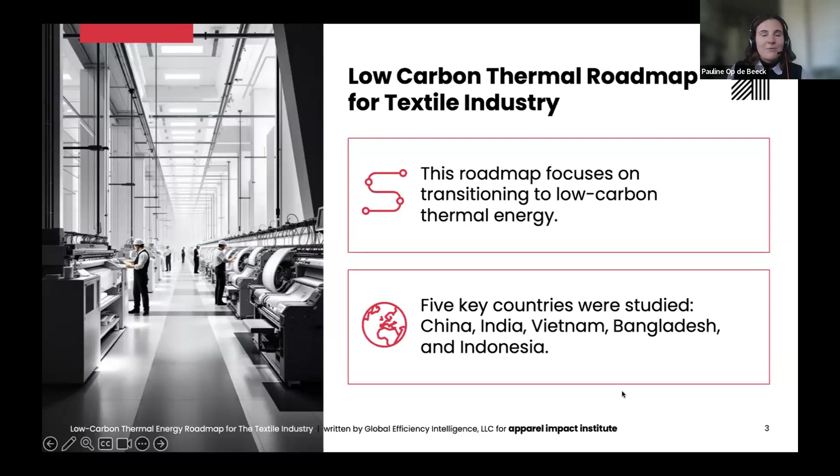And we've commissioned this report not only for the sector to align on and to drive action on this topic, but also to inform AII's grant making, AII's work on how to support the sector on its way to this transition as well. So with that, I will hand it over to the GEI team, who are the authors of this report, to take us through the first part of this webinar.

Thank you, Pauline. Well, hello, everyone. I'm Ali Hasanbeigi with the Global Efficiency Intelligence. Very quick about us. We are a consulting firm based in the US doing work on industrial decarbonization across different industries and across many different countries.

Fun fact, I actually have a textile engineering background. I always say that because not many people working in industrial decarbonization have a textile engineering background. I did my undergrad and master's degree in textile technology engineering. And then since my PhD around 20 years ago, I kind of branched out to broader industrial decarbonization work, doing work on other sectors as well.

But having that textile engineering background and mixing that with the industrial decarbonization work that I've been doing in the past 20 years, we have been doing a number of works on decarbonizing the textile industry, including this latest work that we just published today on the low carbon thermal energy roadmap for the textile industry. First, I would like to thank Apparel Impact Institute for their leadership in this area and also supporting this work. We are literally pioneering this topic for this sector. I hope you will feel the same way and you find the information helpful.

So we published a report. It's actually the second report of a two-report series. We published the first report a few months ago, which was also an extensive analysis of low carbon thermal energy technologies for the textile industry, a lot of qualitative analysis assessing the application of these technologies across many different countries. And in this report is extensive quantitative analysis and then discussion on the roadmap and the recommendations,

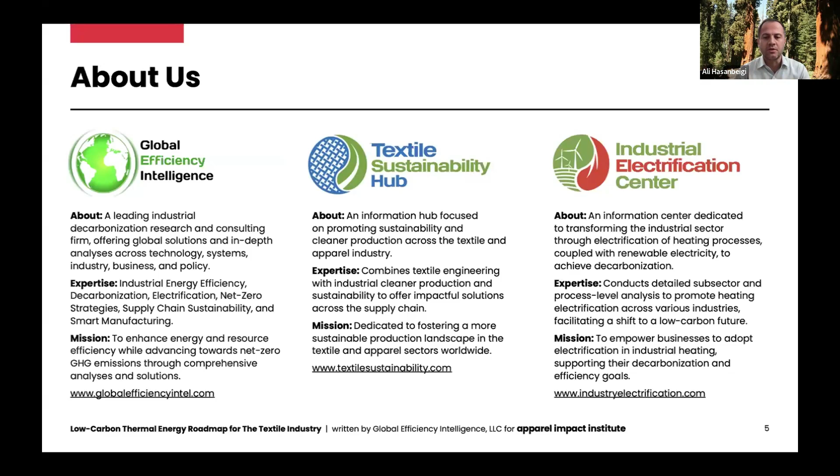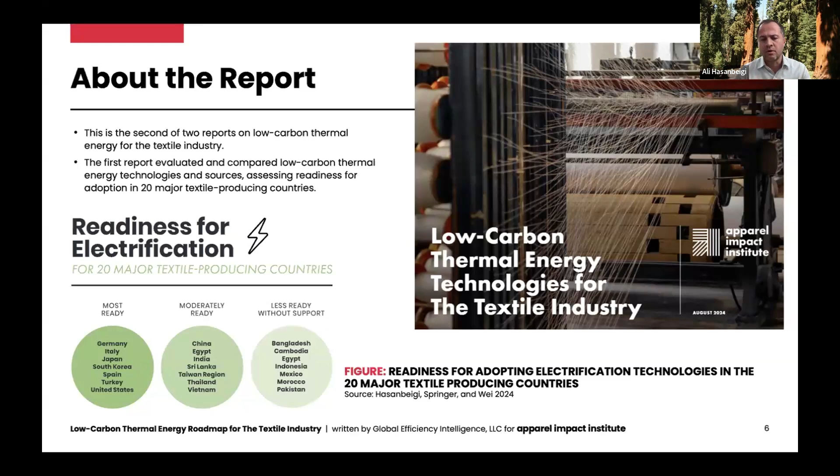So as I mentioned, this is the second report of the series. A few months ago, we published the first report, an extensive analysis, 75 plus pages, where we looked at six different low carbon thermal energy technologies, explained them, and also assessed the readiness for these different technologies in different countries. Top 20 textile producing countries, and we show in different formats how different countries are ready or not ready for adopting these technologies. So I refer you to that previous report for more information.

So when we talk about the industry, and in this case textile industry, there is electricity use and there is fuel use for heating. Electricity is kind of straightforward. You need to use renewables. Fortunately, more and more in major textile producing countries, for example India, China, and now Vietnam and other countries, we are getting more renewable generation. We are getting corporate RE procurement. So it is becoming relatively easier now to decarbonize the electricity part. The heating is the challenge. That's where everybody is scratching their head. So that's the focus of this study, today's conversation and the report: how to decarbonize heat, which accounts for a significant portion of the emissions in industry, and also textile industry.

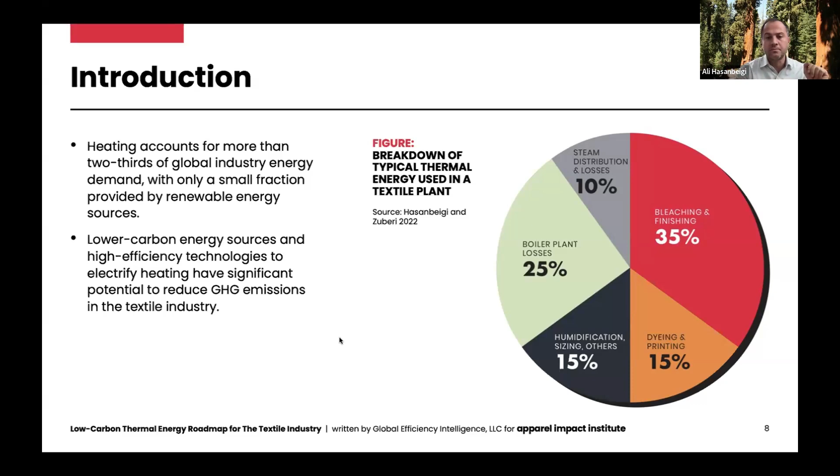So just for a second, let's step back to the big picture. Almost everything you do to decarbonize any industry, including textile industry, falls under 5 decarbonization levers or pillars. Material efficiency, circular economy: anything about recycling, waste management, waste reduction, demand side work, that's that pillar. Then energy efficiency is straightforward. Electrification of heating, which a lot of today's talk is on. Low carbon fuel and feedstock, for example solar thermal, sustainable biomass, etc. And then, of course, CCUS, carbon capture and sequestration, but for textile industry that is kind of irrelevant.

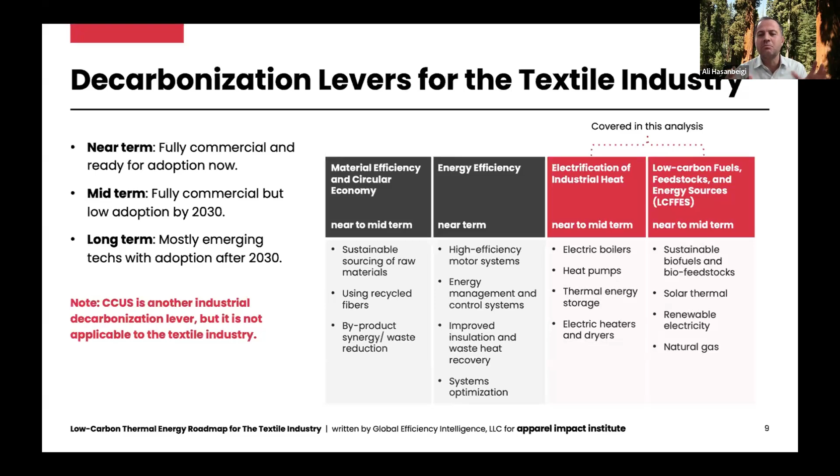So the report we published today and the webinar today focus on 2 pillars, electrification of heating and low carbon fuel. Namely, we have included biomass, sustainable biomass of course would be desired. And also we included natural gas. It's not really a low carbon fuel. It could be lower than coal, but we will talk about some of the caveats as well. Again, in report number 1 a few months ago, we did extensive analysis of these different low carbon fuels and heating technologies, and we compared them in a matrix with regards to certain criteria.

Don't try to read this. This is from the previous report, so I don't want to spend too much time on it. But basically, the more dark blue you see for any technology, that's a good thing. If you just look at this, in an instant you will see that electrification technologies, namely electric boilers and industrial heat pumps, have more dark blue, more optimal with regards to energy saving, CO2 emission reduction, OpEx, etc. Of course, none of the technologies are perfect. So basically, they came out as the winning technologies, both medium-term and long-term, with regards to the advantages they can provide. Of course, there are applications for sustainable biomass that in the near term could provide a solution, and we will talk about that. And natural gas is an option, but many of the top textile producing countries actually do not have domestic natural gas.

They have to import it, all the issues with the import infrastructure, volatility of the cost, etc. But again, I refer you to the first report, just to show you that the technologies we are discussing today are also extensively discussed in the previous report.

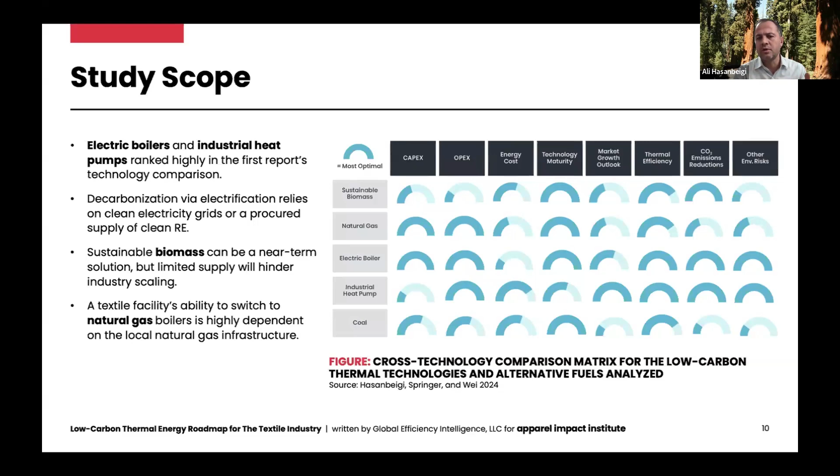And in today's webinar, we focus on the techno-economics of these technologies: electrification, electric boiler, industrial heat pump, biomass, and natural gas. And I hand it now to my colleague Cecilia to talk on a few slides.

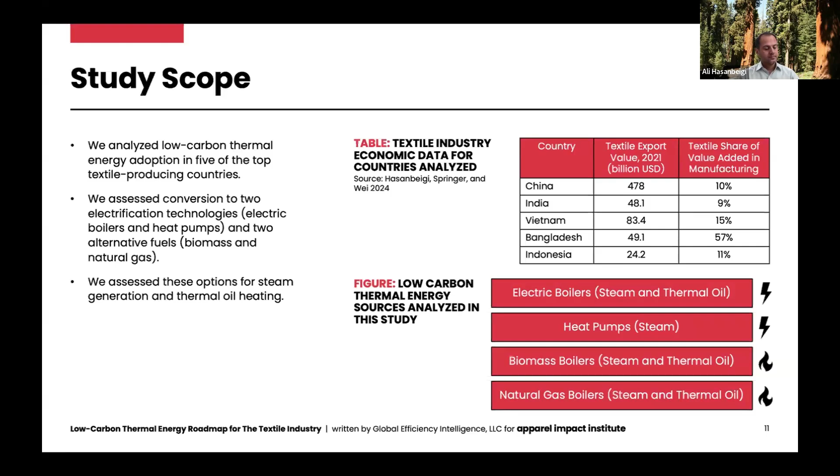Cecilia? Great, thanks, Ali. So to continue, I'll share some more about our study scope and our methodological approach to the techno-economic analysis. As Ali mentioned, we are analyzing 4 low-carbon thermal energy options. 2 of them are electrification technologies, the electric boilers and heat pumps, and 2 of them are alternative fuels, biomass and natural gas. And in terms of geographic scope, we looked at 5 countries, as Pauline mentioned.

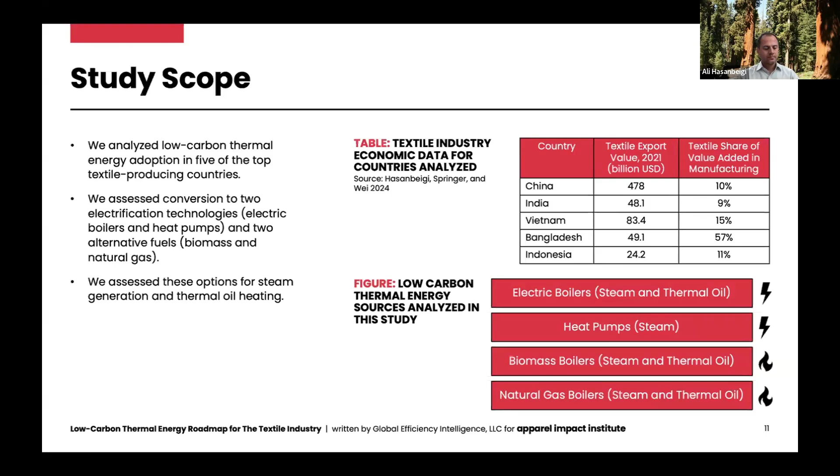These are some of the top textile producing countries by their export value, as well as domestically their value added in manufacturing. So we looked at China, India, Vietnam, Bangladesh, and Indonesia. And importantly, we looked at heating for both steam production as well as thermal oil-based heating.

And this is important because combined, they represent the majority of fuel use in a typical textile wet processing plant, with steam generation accounting for about 50 to 60% of this fuel use, and thermal oil heating is not insignificant. It can be 30 or even 40% of fuel use. So note that throughout our presentation, we're talking about these 2 heating mediums. Next slide, please.

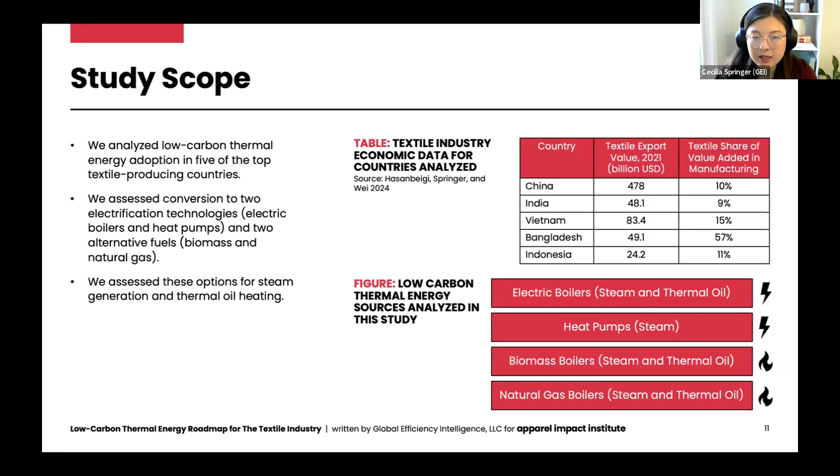So in terms of our approach and methodology for this study, we did a techno-economic analysis of heating-related energy use. We also looked at emissions and costs at a typical textile wet processing facility in each of these 5 countries. So we developed a model to represent a typical facility with annual production of 8,000 tons of fabric per year.

And so we're not modeling a real facility, but we're using all of our data on wet processing and typical production processes, their energy needs, and so on, to look at a typical plant and what it would look like in each country. We added country-specific data on fuel and electricity prices, grid emissions factors, and other things that are specific to the 5 countries that we analyzed.

We also developed 2 scenarios, or what we call pathways, for the electricity supply. This is very important for our analysis of the electrification technologies, understanding where the electricity comes from. And so we looked at 2 electricity supply pathways, one with less renewable energy procurement and one with relatively more renewable energy procurement. And we called this the baseline grid plus renewable energy procurement pathway, and then the ambitious grid plus renewable energy procurement pathway.

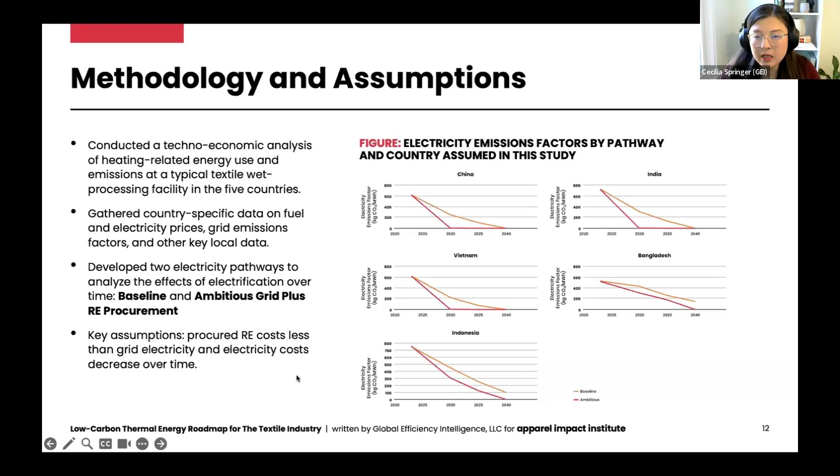And so how did we determine what a typical textile facility might be able to procure in terms of renewable electricity for the baseline and the ambitious pathways? So for each country, we did an assessment of their energy systems landscape, and I encourage you to go to the report to see all of this useful context and sources about each country. We looked at the alternative fuel availability for natural gas and biomass in each country, the state of their electricity grid, and then also their corporate renewable electricity procurement markets.

And based on the state of the development of these RE procurement markets, we use this to inform our scenario development. And so you can see that there's variation across the countries that we studied, with China, India, and Vietnam having relatively robust markets for corporate renewable electricity procurement now and projected to be so in the future, whereas in Indonesia and Bangladesh, those markets are still emerging.

And so there is country-specific variation across our scenarios in terms of how much electricity supply a typical facility could get from the grid versus procuring it, for example, through power purchase agreements. Next slide, please.

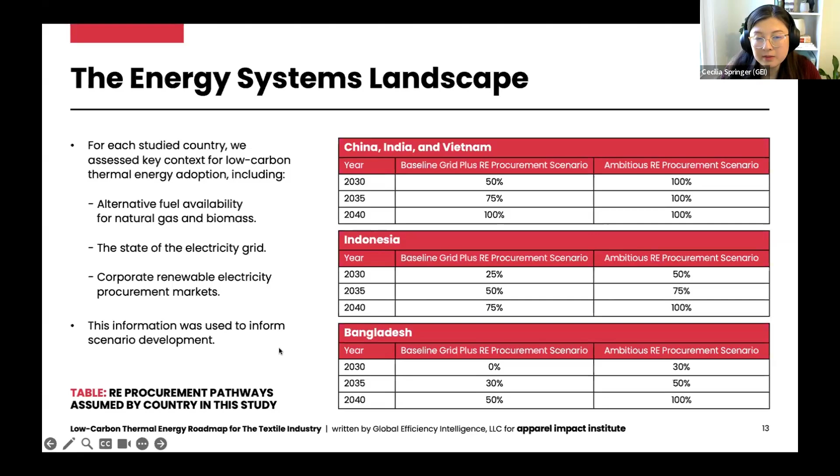So next, we'll move into our results from this analysis, from our techno-economic analysis. And I will present about our alternative fuel results and then turn it over to Ali to discuss electrification. The first thing that we did, we looked at the annual energy use, annual CO2 emissions, and energy costs of the conventional versus the alternative fuel technologies.

In most of the countries studied, in all of them except for Bangladesh, the reference technology or the conventional technology is a coal boiler. For Bangladesh, the reference technology is natural gas, because that's the dominant fuel used for heating in the textile industry there. And so biomass and natural gas relative to coal boilers is what's shown here.

We looked at biomass, both sustainable sources that are assumed to be carbon neutral based on their uptake of carbon in the life cycle of that biomass. And then we also looked at an unsustainable biomass. This is based on the IPCC emissions factor for direct combustion of biomass. When you burn it, it can actually be more emissions intensive than coal.

And so on the top left, you can see that in terms of annual CO2 emissions, unsustainable biomass sources could actually have higher emissions than coal-fired boilers. And so sustainable sourcing from waste sources like agricultural residues is essential for the goal of emissions reductions.

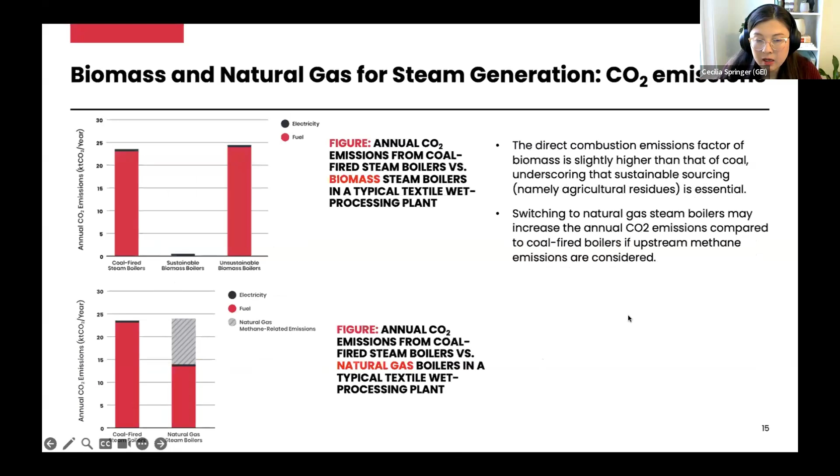So for all of the technologies that we evaluated, we also looked at their energy costs, and we compared the conventional technologies and then the alternative fuels or electrification technologies in terms of the energy cost per kilogram of fabric. And our energy costs take into account fuel and electricity costs per kilogram of fabric. And we also looked at carbon pricing.

So for this study, we assumed that there would be carbon pricing across the countries studied. For example, China already has a national emissions trading system that could expand to include the textile sector in the future, or carbon pricing from a carbon border adjustment mechanism, which is a growing policy in use in the EU and potentially in other major textile importing countries in the future. So you'll see that throughout our analysis.

So what did we find for energy costs for biomass and natural gas? Here we present the example for China, but please refer to our report for extended results on all countries. For biomass, we know that right now, lower prices for biomass are driving significant biomass adoption in a lot of textile producing countries. However, it's very important to note that overall sustainable biomass supply will be limited if multiple facilities across the textile industry are adopting them. There's just not enough supply, and that will drive prices up in the future.

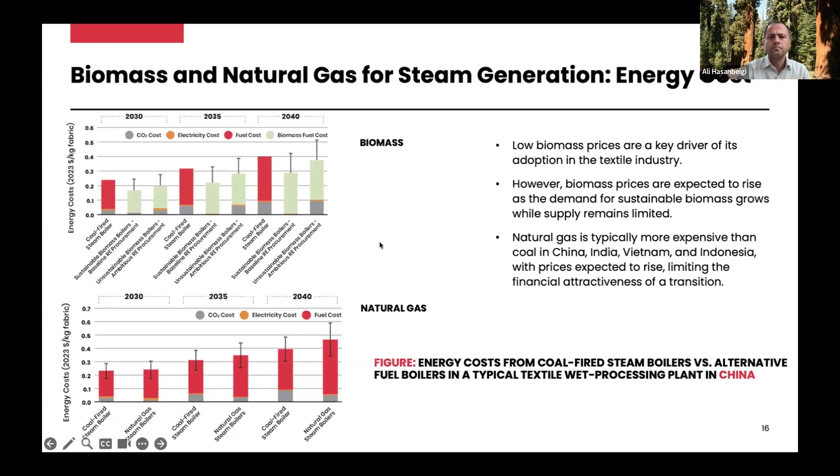So on electrification, again, we have a lot of detail in the report, but a very quick snapshot. We looked at electric boilers and heat pumps. Here we are showing the annual energy use for electric boiler and heat pump for this typical wet processing plant. By the way, for those of you who are not textile engineers, a typical wet processing plant is a textile plant that does the pre-treatment, dyeing, maybe printing and finishing of a fabric. That's very fuel heat intensive in the textile sector. So if you want to decarbonize heat, that's the place you want to start.

So these results show the annual energy use for a coal-fired steam boiler on the left, and then an electric steam boiler. Coal-fired steam boiler, typical efficiency, 70 to 80%. Electric steam boiler, typical efficiency, 98 to 99%. So immediately you get around 20% efficiency gain in final energy terms. Heat pumps are extremely efficient, way more efficient. Here, when we talk about heat pumps, we are talking about steam generating heat pumps. So keep that in mind.

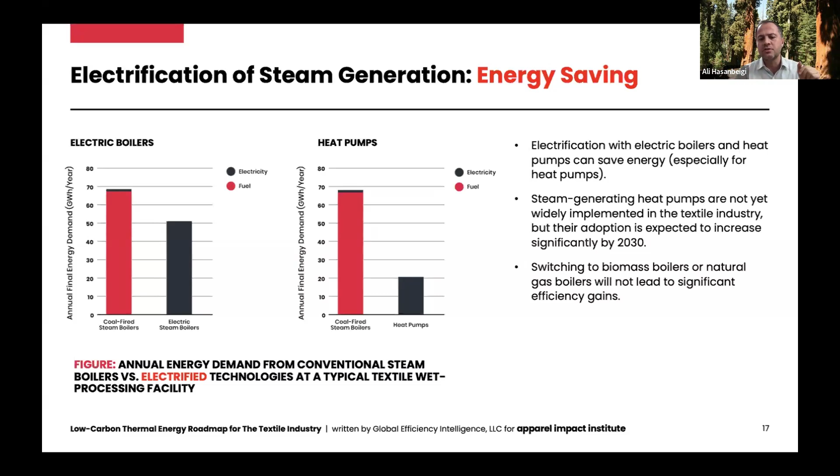Steam generating heat pumps applicable for the textile industry usually have a coefficient of performance, or COP, the indicator we assess their efficiency with, of more than around 2 to 2.5. In simple terms, that's more than 200% efficiency, compared to an electric boiler at 99% and a fossil fuel combustion boiler at 70 to 80%. So heat pumps are very efficient. That's why you see the significant drop in annual energy demand of a steam generating heat pump versus a coal boiler.

And of course, in the other scenario, we assume you can get 100% RE in 2030, which, by the way, you can get today. In China and India, plants significantly larger than textile plants, like steel plants, are doing PPAs, power purchase agreements. So it's doable even today to get 100% RE in a textile plant if you electrify. I'm not talking about the cost, but in terms of availability in some of these countries.

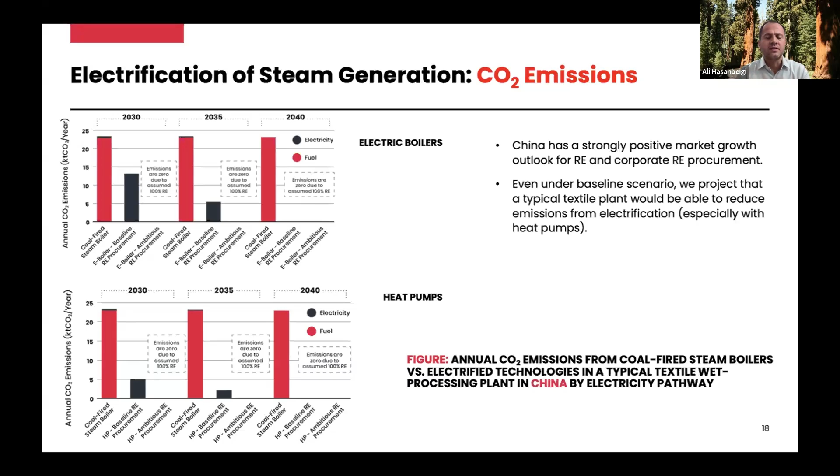Same story with heat pump. It's just heat pumps are significantly more efficient, as I just mentioned. So you just see that the emissions drop and the delta of emissions between heat pump and coal boiler is significantly larger because they give you substantially more efficiency, so substantially lower emission associated with heat pumps. So heat pumps definitely are a significant advantage here when we talk about energy and emissions.

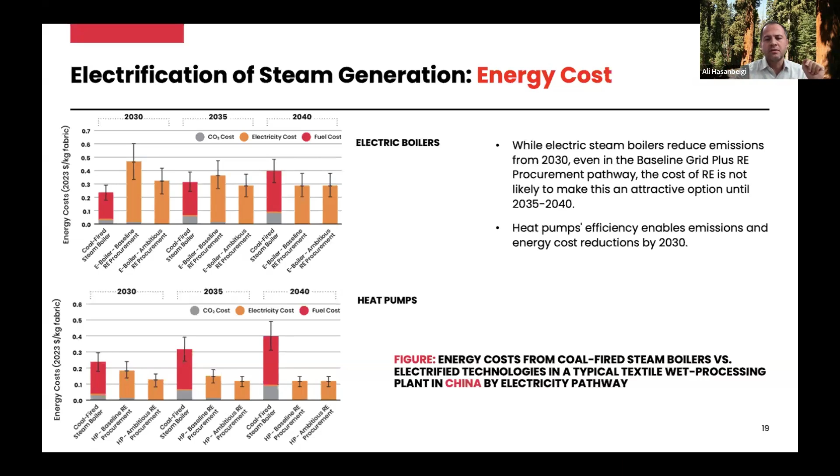However, when we go to the lower part, heat pump, again, because of the significant efficiency gain that they provide, they help with lowering the cost of energy because they're using significantly lower amounts of energy. So immediately, even in 2030, the energy costs of heat pumps are lower than the coal boiler. So that's another advantage that heat pump efficiency gives us.

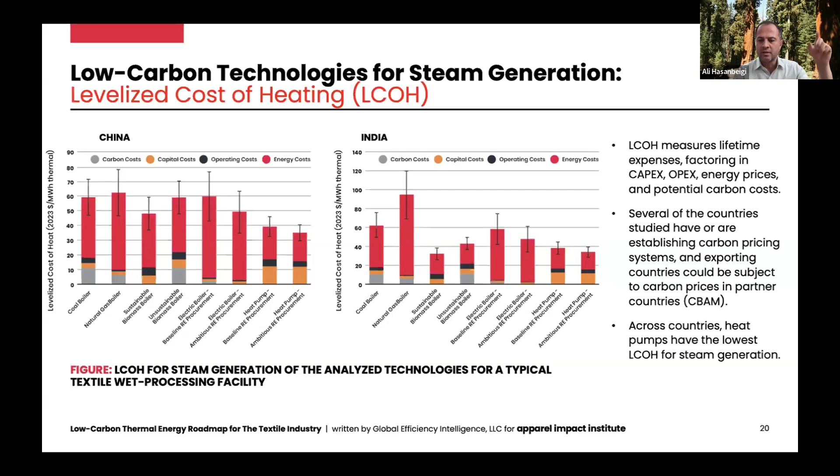So one takeaway you should have: you cannot judge these technologies, especially things like heat pumps, with payback period. You cannot get to net zero with a 2-year payback period, especially now. 10 years from now, when the cost of a lot of things drop, the CapEx drops, the RE drops, then maybe. But now there are different ways of looking at costs. Levelized cost is a good way to look at it, and even energy cost, and looking at the gap, the magnitude of the gap, and what it means for the green premium.

But as you can see, across all countries heat pumps have the lowest levelized cost of heating. And electric boilers, actually, in most countries also have lower levelized costs compared to the coal boiler. So that's another takeaway to have on the cost side.

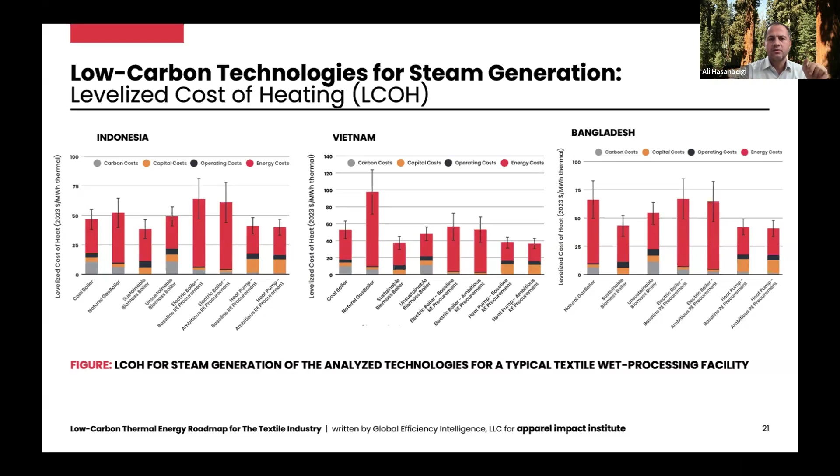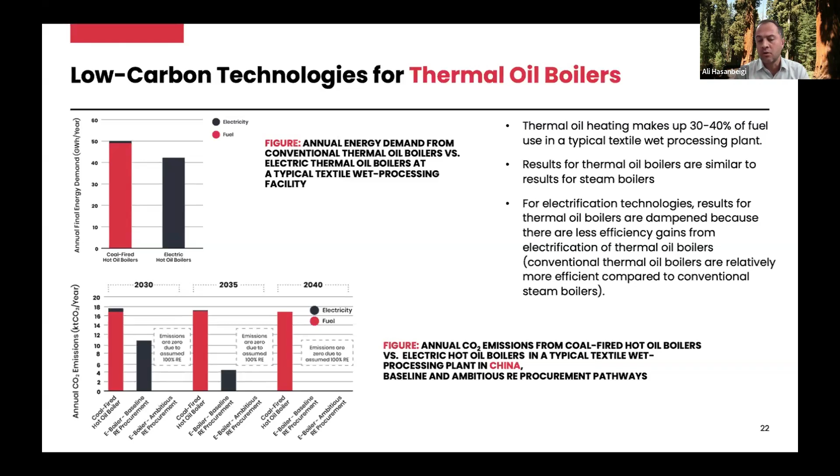So we did the same analysis. They provide efficiency, so lower energy use for sure. The annual CO2 emission, depending on the scenarios you look at, is always lower than coal boilers. I go through it a bit quickly. I'm trying to be mindful of time.

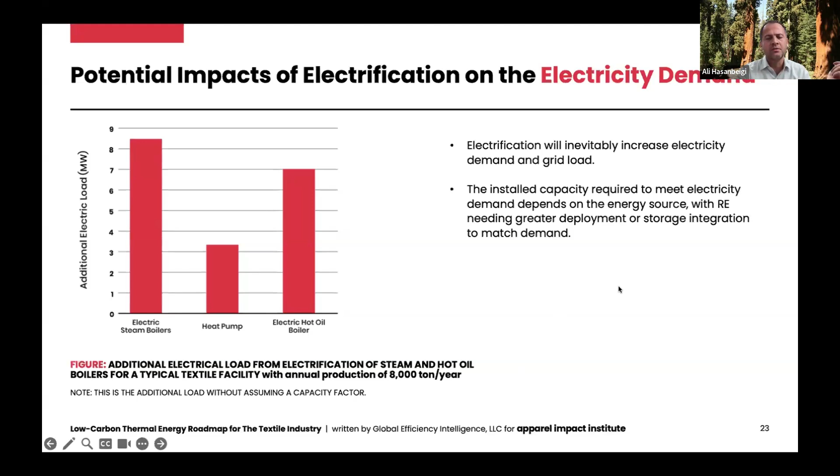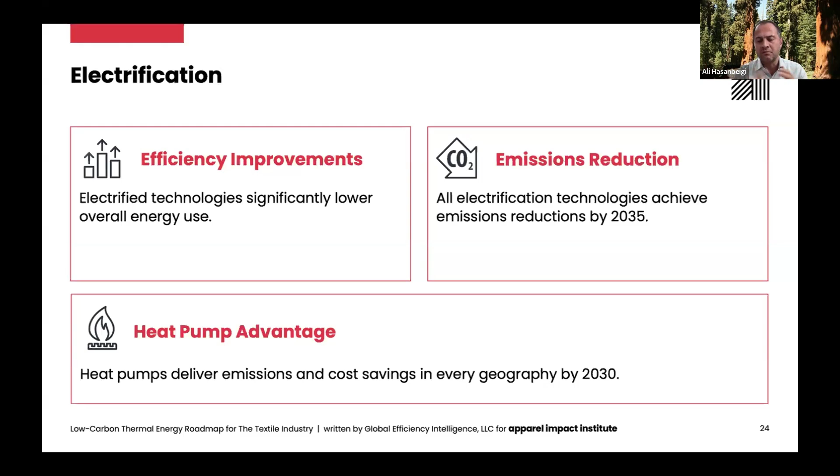So to wrap up, I think I already talked about these items. Basically, electrified technologies provide significant efficiency. As you saw, in all cases they reduce the emissions, even in the near term, depending on the electricity supply mix. But heat pumps have the most advantage here. They can give you the reduction immediately. They can give you even cost saving. And they're commercial technologies. This is the good news. Everything we are talking about here today is commercial technology. They're not some future technology. You can buy them today.

But electrification goes hand in hand with renewable energy procurement and supply. At the end of the day, even though you get emission reduction with some mix of RE compared to coal, we are in the age of net zero. Eventually, we want to get to net zero. Not tomorrow, but at some point, definitely by 2050. So we need to clean up the electricity. And we need mechanisms, regulatory infrastructure for corporations to procure RE.

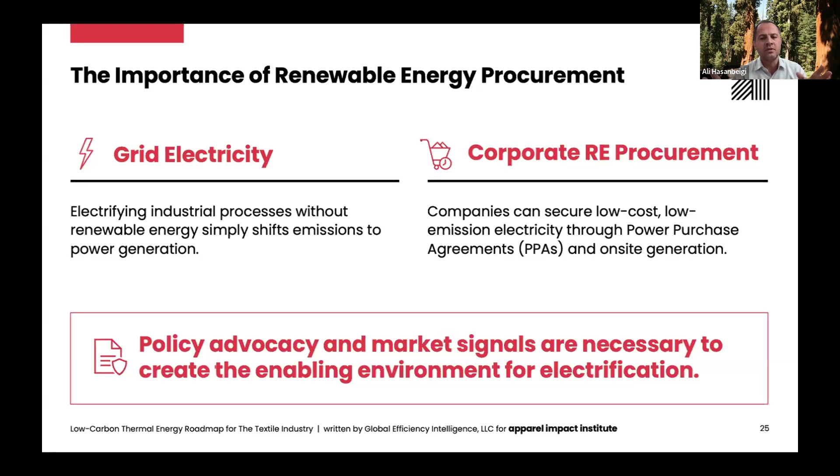Fortunately, some of the major textile producing countries, namely India, China, and now Vietnam, are some of the best in Asia in terms of corporate RE procurement. India is one of the best in the world, honestly. So that's good news. And we have a lot of textile companies there. So there, it's a sweet spot for electrification. But countries like Indonesia and Bangladesh are lagging behind, mainly because of not only generation, but also not having the regulatory infrastructure for corporations to procure RE. So we need that to happen.

In summary, natural gas basically is not a solution. It's a fossil fuel. Actually, we should call it fossil gas.

Most textile producing countries, if you look at our first report, they simply don't have it. They're all importing it. We saw what happened in the past few years. The price is fluctuating, it's just going to increase. And if LNG is imported, there are additional emissions associated with that. So it's basically not a solution. And if you add the methane emissions to it, you're not really reducing emissions.

Biomass can be a near-term solution if, and that's a big if, it's sourced from sustainable sources, which is limited. And many industries and the power sector are going to compete for this limited source, and the prices will go up. And if you find cheap, easy biomass, there's a good chance it's simply not sustainable. If it's too good to be true, that's probably the case.

And firsthand, we have seen in a number of countries in South Asia and Southeast Asia, a substantial amount of non-sustainable biomass is used. It's basically a matter of time. Some of the NGOs will knock on the doors of textile plants and apparel brands, and they'll get into trouble with that if they're ignoring the environmental consequences.

Electrification basically is the most viable, I would say not even long-term, short-term solution in some of the countries and medium to long-term in some others. The technology is there, it's commercial, and the renewable generation is there. It's just a matter of the cost and financing.

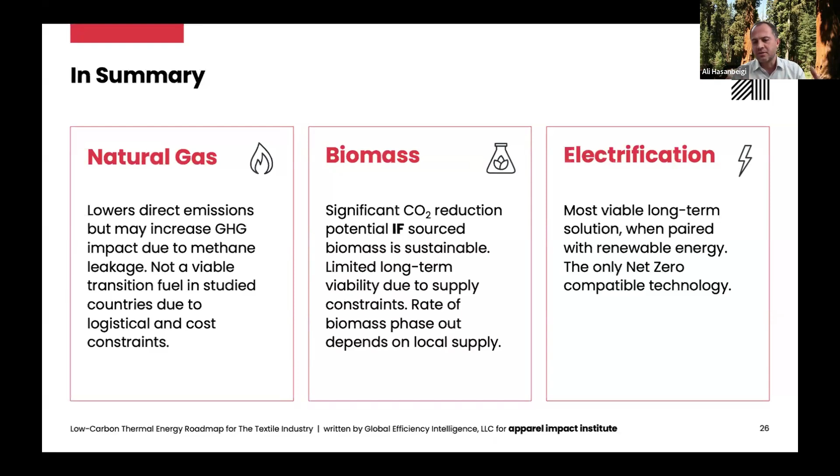So I would say the textile industry is an easy to decarbonize sector. We do work in other sectors like cement and steel. They're called hard to abate. Textile is easy to abate because the technologies are here. We just need to figure out financing and the cost, and the stakeholders need to work together on that.

So I'm going to hand it over to Cecilia to walk you through the roadmap and recommendations. Cecilia? Great, thank you, Ali.

So in the report, we walk through some of the steps that a textile facility could take to prepare for electrification, from data gathering to planning for the electrical load increase and the types of analysis a facility would need to do and the equipment they might need. We also walk through what a feasibility assessment for electrification technologies would look like. And to that end,

separately from this project and with support from the Outdoor Industry Association, GEI recently released a textile heating electrification tool. I'll try to share the link in the chat, which we think can be a first step towards understanding feasibility of electrification for textile facilities, where you can put in your own data.

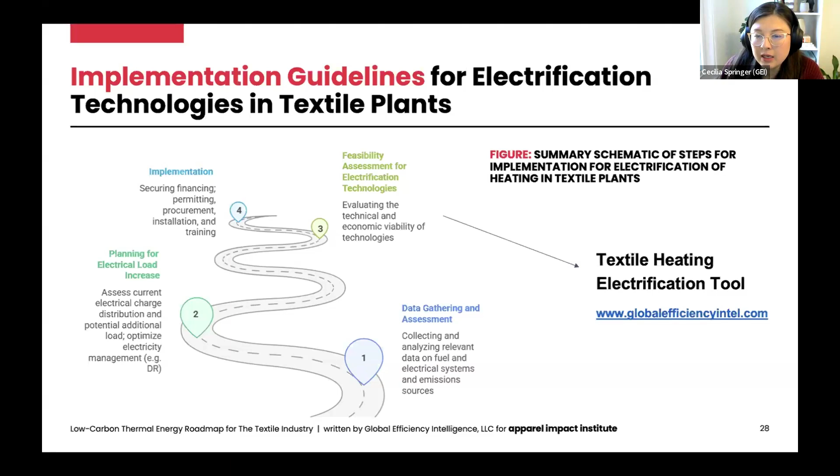As part of the roadmap, we also discuss the financing mechanisms that can be available for transitioning to low carbon heating. And to that end, I want to highlight that AII last fall published the brand playbook for financing decarbonization, which is oriented towards brands and different financial tools that can be available. But of course, it can also benefit textile manufacturers and even financial institutions.

And so we draw from that in the report, and here highlight 5 different financial strategies for advancing low carbon heating in the textile industry, from traditional debt-based financing to emerging green financing mechanisms like sustainability-linked loans and guarantees for green technologies based on sustainability performance metrics.

I think also a growing area is government, development finance, and philanthropy support for low carbon heating as awareness of its decarbonization potential grows across institutions that are active in the countries we mentioned, for example, the World Bank, Asian Development Bank, Green Climate Fund, and so on. There's also venture capital equity-based investments and brand premiums, which will be very important, I think, in the early stages, and we discuss this more in the recommendations.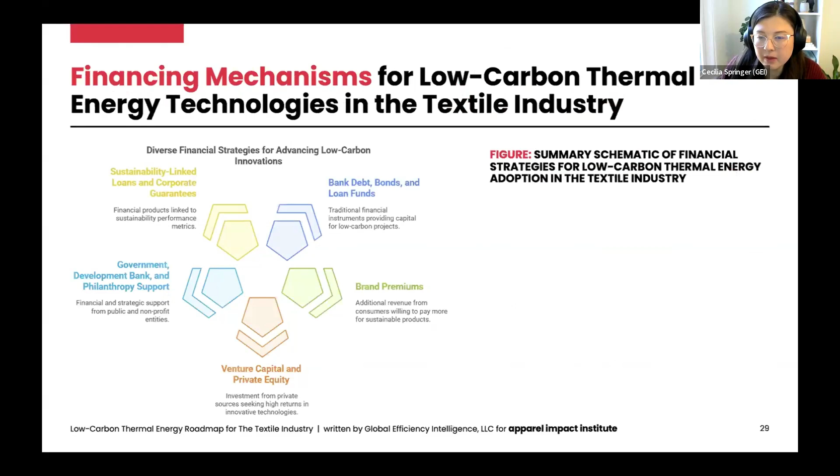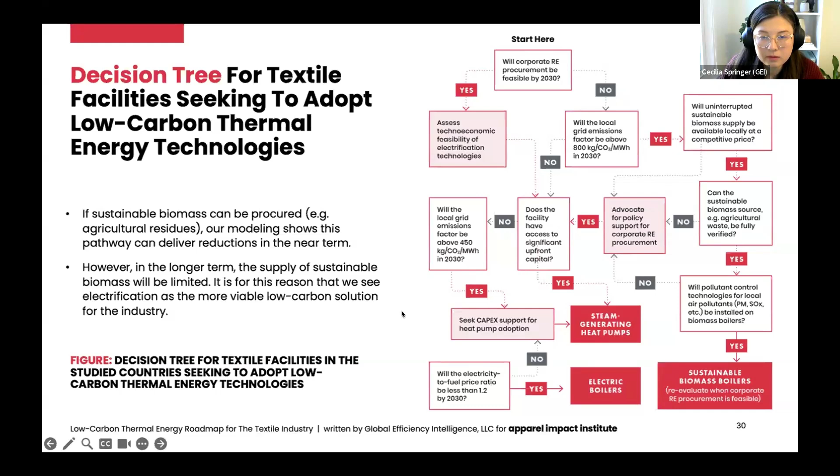Next slide, please. Just a quick note. I realized there are some typos and missing links here. This is like a previous version. We corrected it in the report, but apparently it's not reflected here. Just please refer to the report for a very slightly different version with some of these typos corrected. Sorry about that. Go ahead.

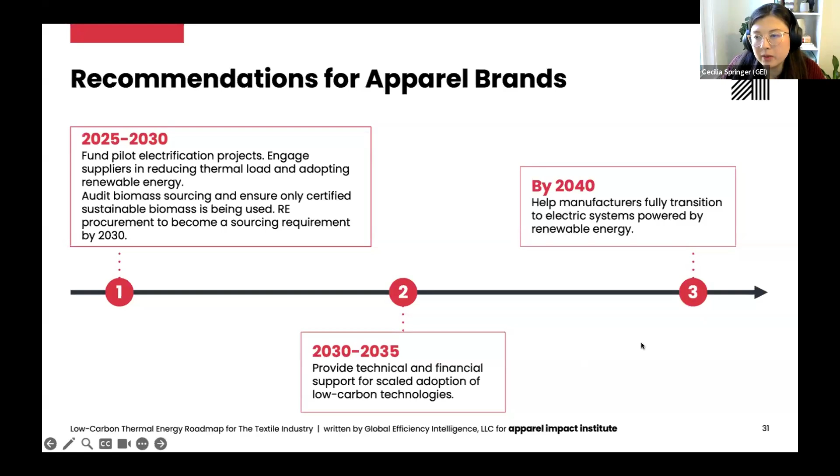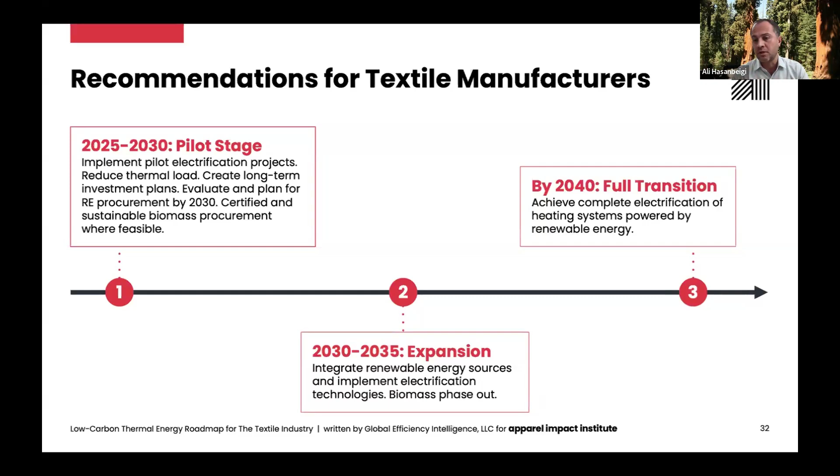We just need to bring the stakeholders, the brands, the suppliers, the financiers, and some grants to make these first movers do this. And we cannot expect textile plants and suppliers to do this. It's just not fair to ask them to do it and pay for it. So brands need to play a role. AII and other folks outside also can bring help and financing and technical capability. I think it's important to make this happen between now and 2030. So with that, I would like to conclude our technical presentation and go to Q&A.

Fantastic. Thank you both. So as the presentation and the Q&A have shown, there is a lot of work to be done on achieving this. It's by no means inevitable and just going to happen in and of itself. So I'd like to take you through AII's call to action and also how we aim to support the sector in achieving this.

So we are at a critical juncture. Not only is it 2025, which is a critical time point in and of itself, as we're halfway to that 2030 target, but to Ali's point, you cannot achieve net zero without looking at your energy source, and this will make up the majority of energy reductions that have to take place. And while the transition might not be immediate, there is immediate action needed in order to realize this transition. And a lot of that will come from brand leadership.

We want to encourage a market signal to come from brands that they will be pursuing this within their supply chains, that they will do policy advocacy in the countries that they source from, to support the enabling environment we need in order to have sufficient corporate procurement of renewable electricity, and of course to collaborate with their suppliers so that the suppliers can implement this transition. And really importantly, it should be a just transition.

Ali and Cecilia presented the recommendations that are made in the report. It is very clear that this has to be a collaboration and there has to be financial support from brands to suppliers in order to make this happen. Those payback periods mentioned are quite a lot longer than the sector currently feels comfortable with and what currently takes place. So there will need to be financial support in order to bring that ROI to a level that textile manufacturers can accept and can implement.

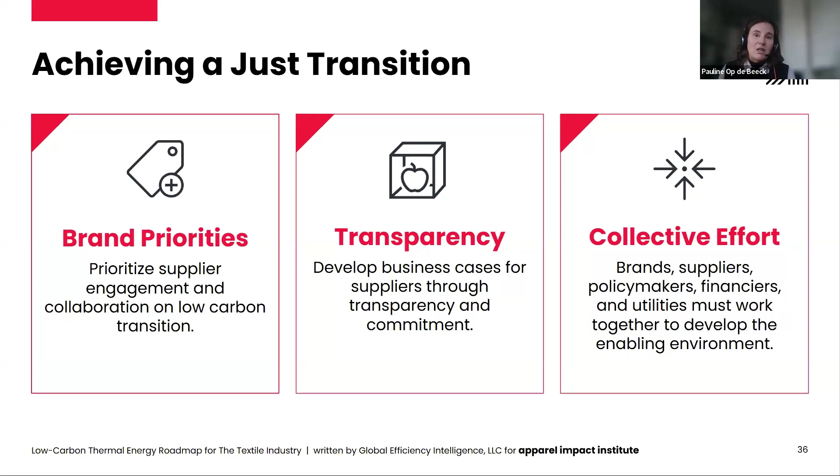And being clear on what brand decarbonization priorities are, and transparency on how this links to sourcing strategies, is essential to have that collective effort, so that brands, textile manufacturers, policymakers, financial institutions, and utilities all work together on this topic.

So what is AII aiming to do about this? We will have a climate solutions focus. For those of you maybe not so familiar with AII, we have a climate solutions portfolio, which is a list of vetted solutions.

And to the last question that was asked, we will have a big focus on solutions that reduce that thermal load. This is not only relevant for countries which may be electrifying at a later stage, but for textile manufacturers across the board that are hoping to improve the kind of economics of electrification. The first step is really to reduce the amount of energy you're using in the first place.

We have a program called the Renewable Energy Transition Initiative, which helps textile manufacturers with that technical assessment of how do I set up such an energy system, helps with the vendor selection as well as the implementation. This is something that we're launching in China this year, and we'll be piloting in India and Vietnam as well. And we offer grant funding as well.

So actually, we had a call for grants that was opened in November for suppliers to come with electrification projects that we could provide the grant funding for those pilots. And that deliberation is actually currently underway. And I look forward to sharing with you in a couple of weeks' time which projects we supported.

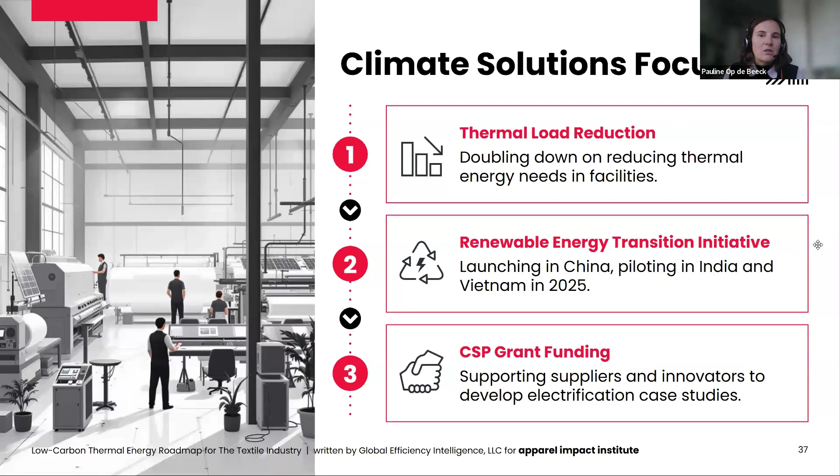Then we will also do a lot to bring the ecosystem around this topic. So we are setting up a supplier advisory council this year, meaning that we want to make sure that this transition is a just one. And in order to do that, we want to hear from suppliers what is needed in order for the sector to achieve a just transition and how that can filter into AII's work to make sure that all of the support we give is supporting suppliers in the way that they need it.

As I said earlier, we really want to encourage a brand electrification market signal, renewable energy procurement targets, so that their sourcing strategies are very much aligned to net zero and that this is communicated to the textile manufacturers within their supply chain.

And finally, making sure there's sufficient financial tools to support this. We've discussed a lot that there is a price tag to this, and there is a lot of sustainable finance work that AII is currently doing and will continue and increase to make sure those different tools are available for textile manufacturers and for brands to use to support their implementation.

And this links into wider industry collaboration work that AII does as well. Some of you may be familiar with the carbon and energy intensity benchmark that we're working on. This is our aim to create a core long-term business case for decarbonization, with sourcing teams linking this benchmark, creating that connection between the sourcing and sustainability teams, with the carbon intensity benchmark really being the one to track where your supply chain is on its low carbon thermal energy transition.